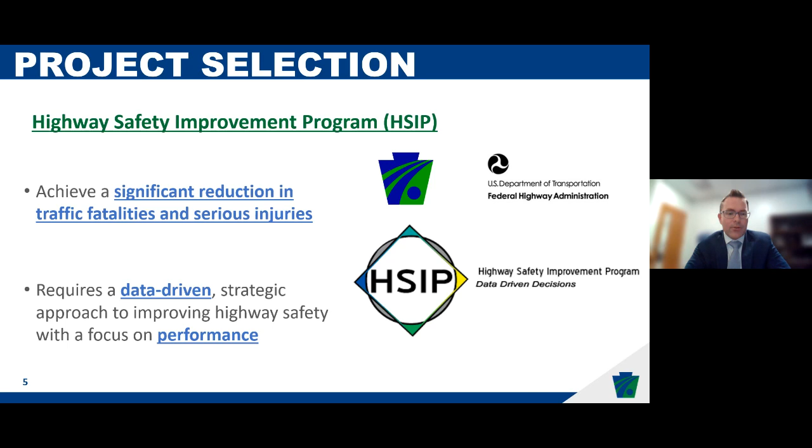Now I'll turn the presentation over to the design team and Andrew to run through the project and how crashes can be reduced along Washington Lane.

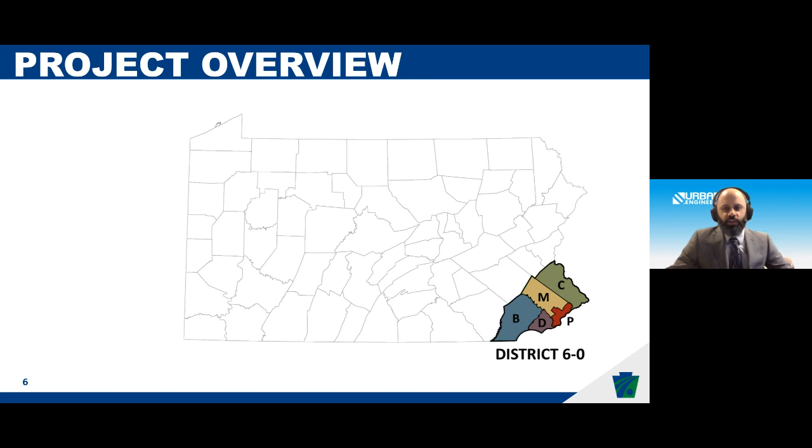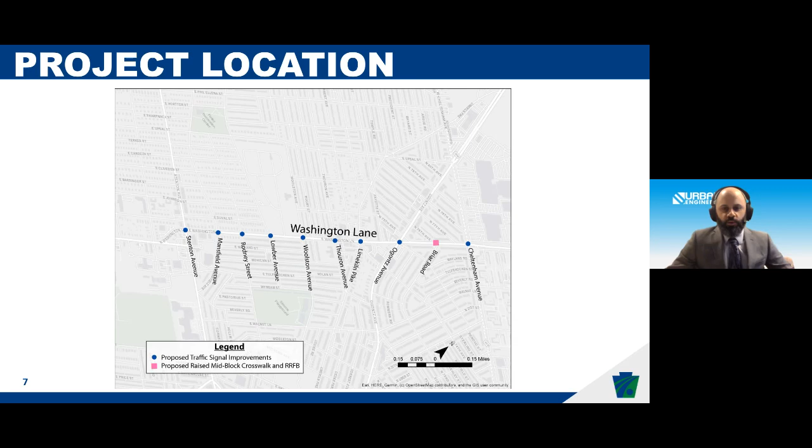Thanks, Nate. This safety project is located in Philadelphia County near the Montgomery County border. The project runs from Stenton Ave to Cheltenham Ave along the Washington Lane corridor. The project is localized at all of the signalized intersections shown here, with work included at Stenton, Mansfield, Rodney, Lowber, Woolston, Thouron, Limekiln, Ogontz, Briar, and Cheltenham Ave. Later in the presentation, Abby will highlight the proposed design at each intersection.

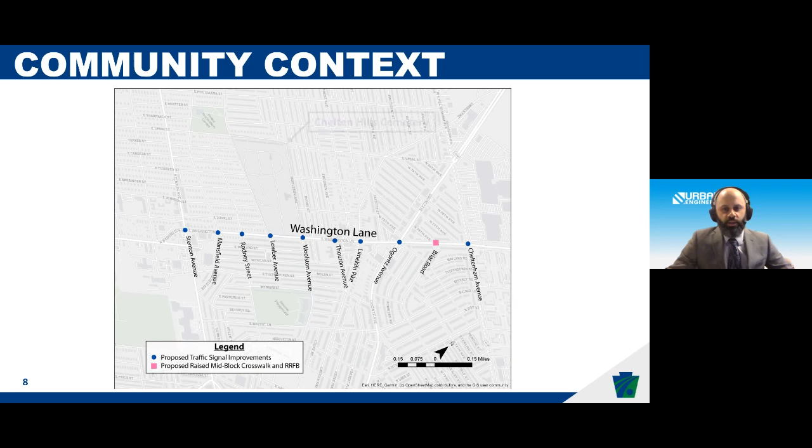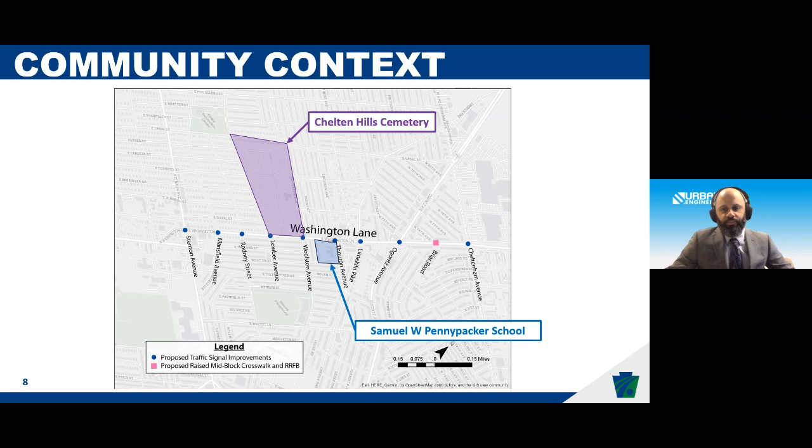Just to give everyone a little context of the corridor, there are three elements worth noting. In the area of Lowber and Woolston, there is the Chelten Hills Cemetery. Near Thouron Ave is the Samuel W. Pennypacker School. And at the northern limit of the corridor is the Washington Lane Historic District.

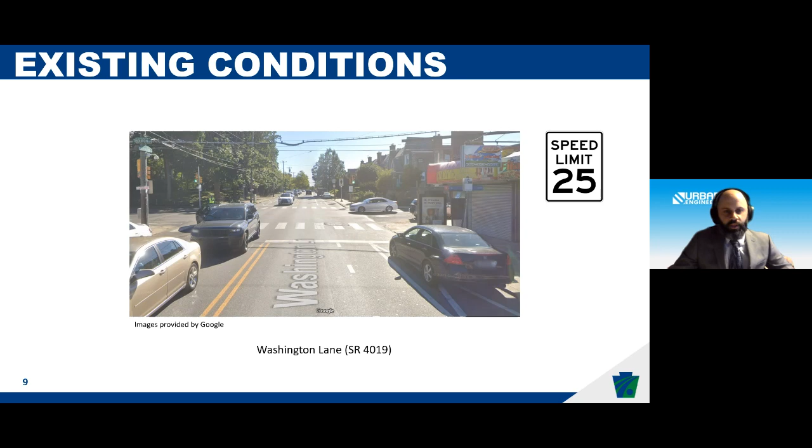Here's an existing photo to give context to the corridor. The project is about 9 blocks long along Washington Lane. The speed limit is posted at 25 miles an hour. We have one travel lane in each direction with parking on both sides and bike lanes on both sides. There are bus stops at all the signalized intersection corners, and it is a signalized intersection corridor.

So why we're here tonight describing this project to you, the purpose of the project is to reduce the number and severity of potential crashes along the corridor. Additionally, the project will improve safety for pedestrians and bicyclists at the signalized intersections. The project was selected and identified by PennDOT as a corridor with a high percentage of fatal, injury, and pedestrian crashes. The project's intersections have experienced 99 crashes over a 5-year period from 2018 to 2022.

Of the 99 crashes, roughly 15% of them were pedestrian crashes. Pedestrian crashes are very critical along this corridor, as pedestrians are vulnerable road users and do not have the protection of steel cages like vehicles. Crash numbers will be shown later in the presentation for each intersection.

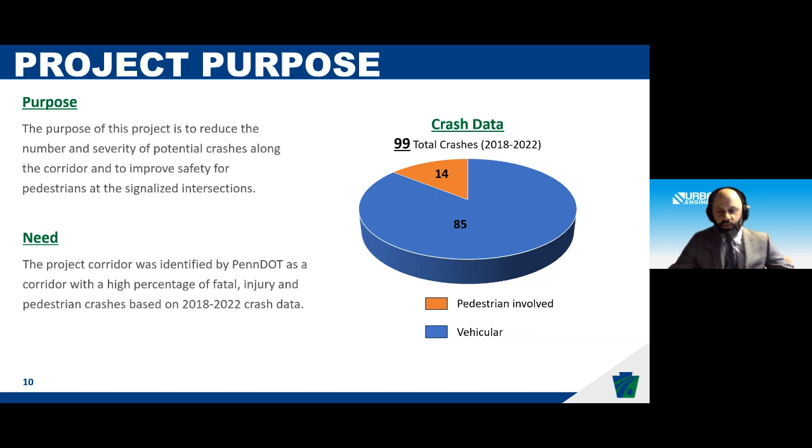To give a little project overview, we are located in Philadelphia, and PennDOT is aware of all the SEPTA routes present in the project area, both along the corridor and crossing it. We've also reviewed SEPTA's bus revolution recommendations, which show the Route 81 bus running along Washington Lane. As PennDOT enters final design for the project, we will coordinate with SEPTA on bus stop locations, and those may change through final design.

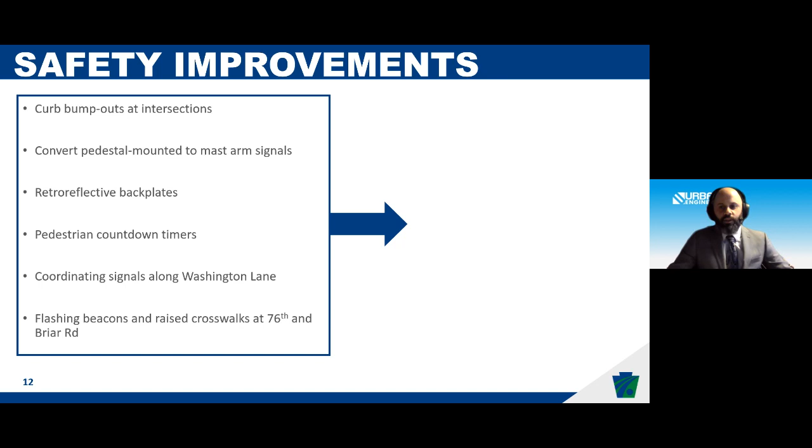This is a safety-driven project, so here's a list of the safety improvements that are proposed. Each safety measure was included in a highway safety manual analysis to determine the reduction in crashes. These improvements were evaluated at a corridor level, and the project is expecting to reduce overall crashes by 13% and reduce fatal and injury crashes by roughly 12%. The next few slides will explain what each safety improvement measure will look like.

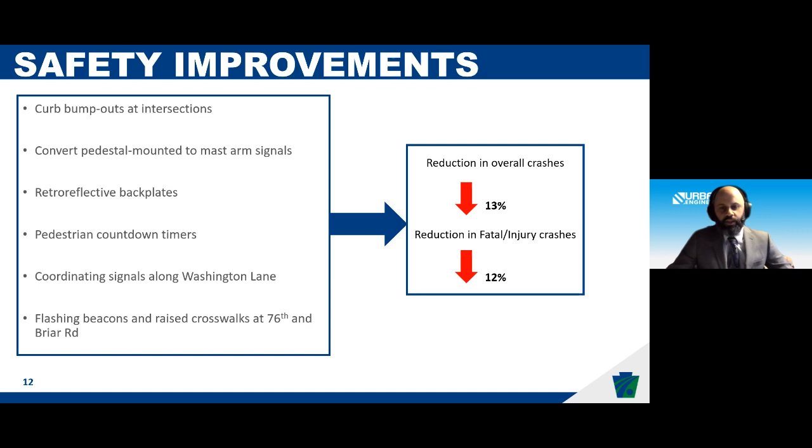Now we're going to get into the safety improvements included with the project: bump outs. All the intersections will have proposed bump outs where applicable. A curb bump out is when the sidewalk bulbs out into the intersection, taking up a parking lane or bike lane, or utilizing unnecessary pavement.

Bump outs keep pedestrians safer in three distinct ways. First, by making the crossing distance shorter for pedestrians, they decrease the time a pedestrian is in the street and vulnerable to being hit by a car. This also allows the pedestrian to complete the crossing more quickly, thus allowing traffic to flow better.

Second, bump outs also serve to make the neck of the street narrower at the intersection. This restricts cars from making lefts and rights too quickly, slowing them down. Lower speeds increase the time for a driver to see a pedestrian and decrease the likelihood of severe injuries if a pedestrian gets hit by a car.

Third, bump out installations essentially prevent vehicles from illegally parking near the corner. Vehicles at corners obstruct vision for drivers making turns, as well as for pedestrians seeking to cross.

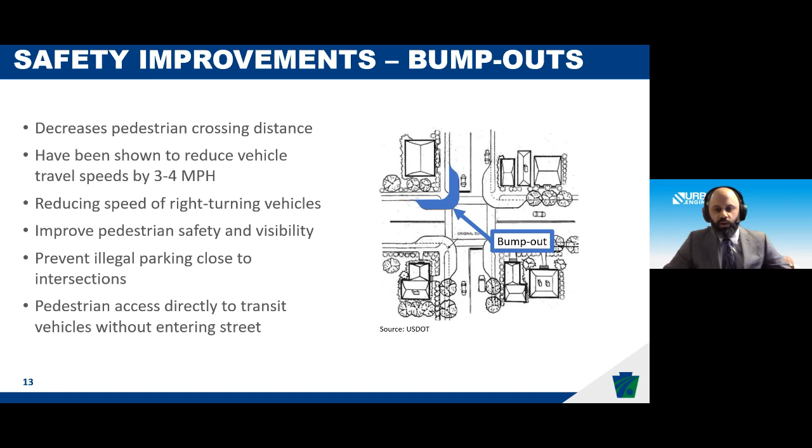One feature of these bump outs, to better improve bicycle presence at the intersection, is to bring bikes up to sidewalk level at the intersections. This allows buses to load in lane and removes the conflict of a bus boarding and unboarding while blocking a bike lane.

Here's an image provided by a City of Philadelphia employee, showing an example of a surface bike lane in Seattle, Washington. You can see the bike lane striped out here in green, and off to the left is the bus shelter for loading, so pedestrians will have to cross the surface sidewalk-level bike lane.

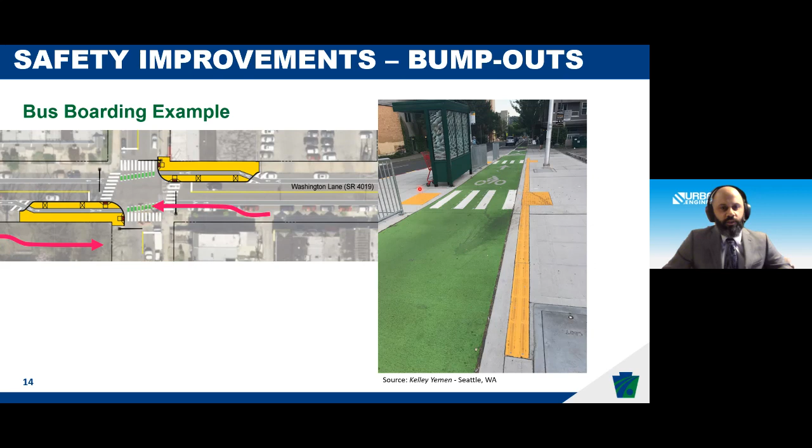Here's another photo of a bus boarding segregated from a bike lane. This eliminates the immediate conflict of a bus unloading passengers onto a bike lane or blocking it.

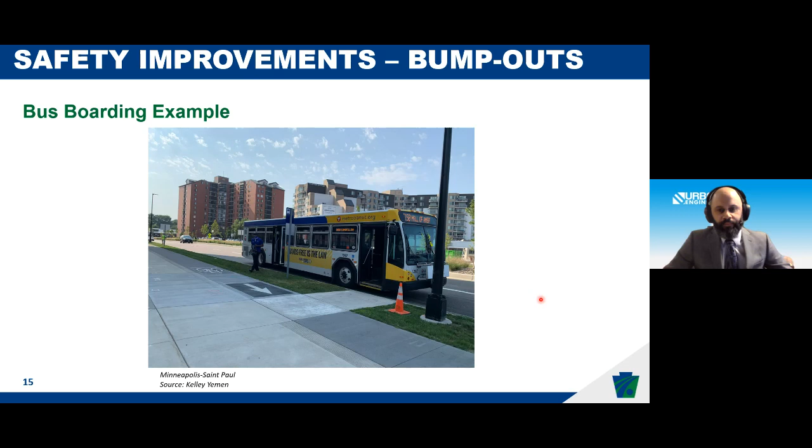Here's an example of a bump out. You can see the curb line curves toward the roadway by eliminating the shoulder.

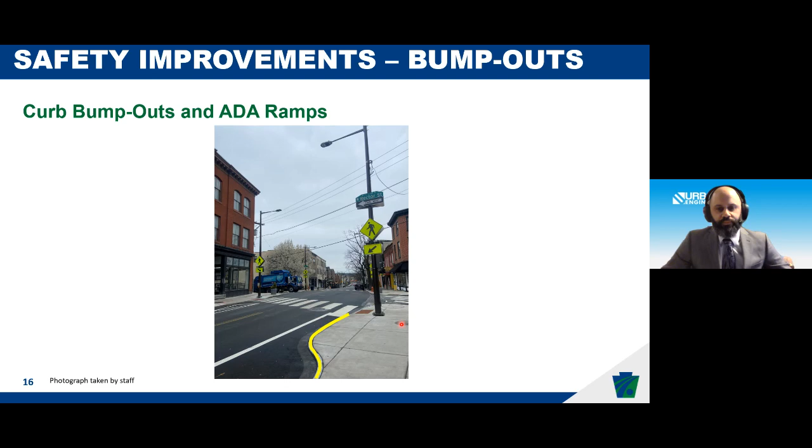The project will be converting old pedestal mounted signals, shown on the left, which are typically off the roadway, to mast arm signals, shown on the right. Mast arm signals place the signal overhead the lanes to provide better visibility for oncoming vehicles.

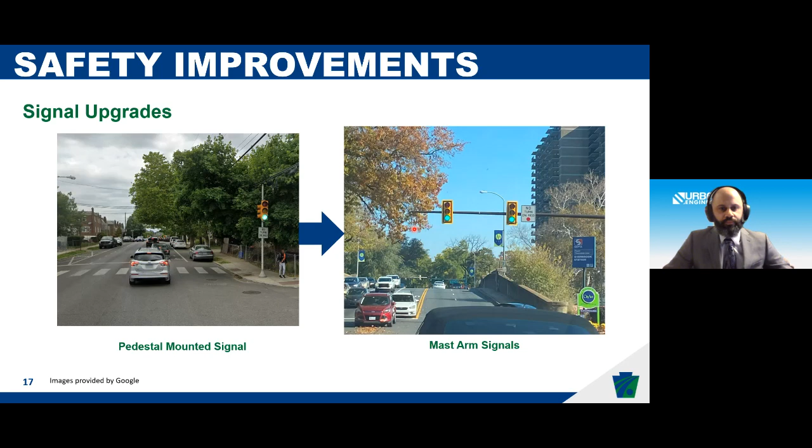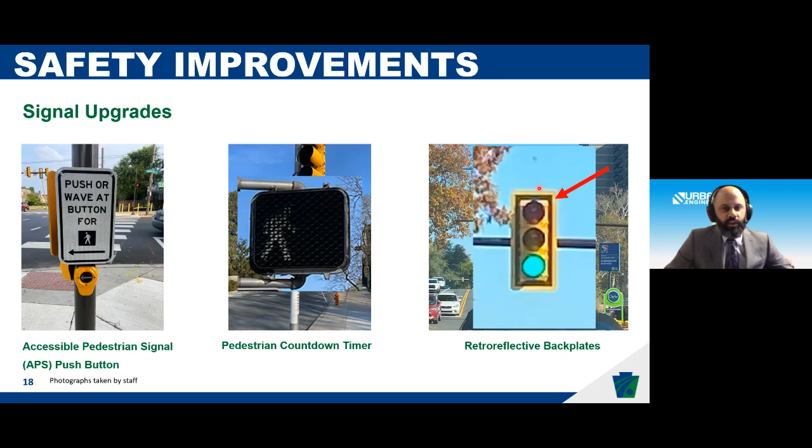The project will also install accessible pedestrian signals, or APS push buttons, shown here on the left—you simply push it or wave at it to actuate the signal. We'll also be installing pedestrian countdown timers and retroreflective backplates with a yellow border around the signal to improve visibility.

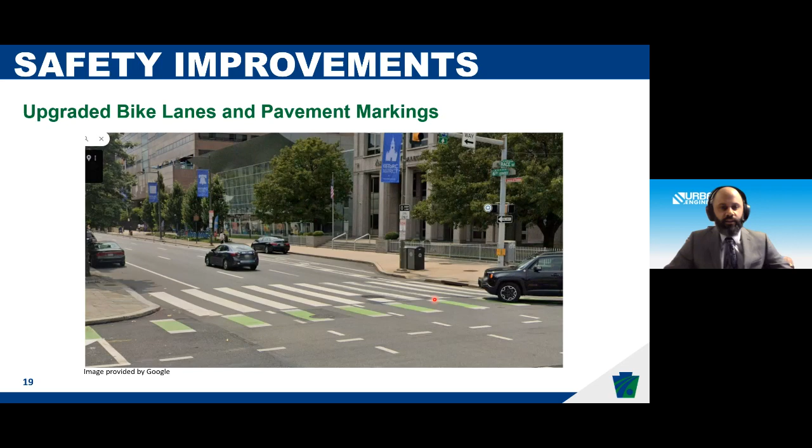Pavement markings will be refreshed throughout the corridor and include bike lane conflict markings to better delineate traffic, both vehicular and bicycle, through the intersections. This will improve visibility of bikes along the corridor, specifically at intersections where there are conflicts.

The project will also install a rectangular rapid flashing beacon, or RRFB. These are a proven safety measure to improve yielding compliance at mid-block crossings. To actuate the signal, each pedestrian must push the button or wave at it while standing on the ramp. RRFBs are a proven safety measure from Federal Highways and can increase compliance by upwards of 98%.

Also, the Briar Road mid-block crossing that's being proposed, which you'll see concepts of from Abby later, will be a raised crosswalk, where the roadway profile is raised to match the level of the sidewalk. This slows cars down and makes the sidewalk-to-crosswalk transition easier from a pedestrian perspective.

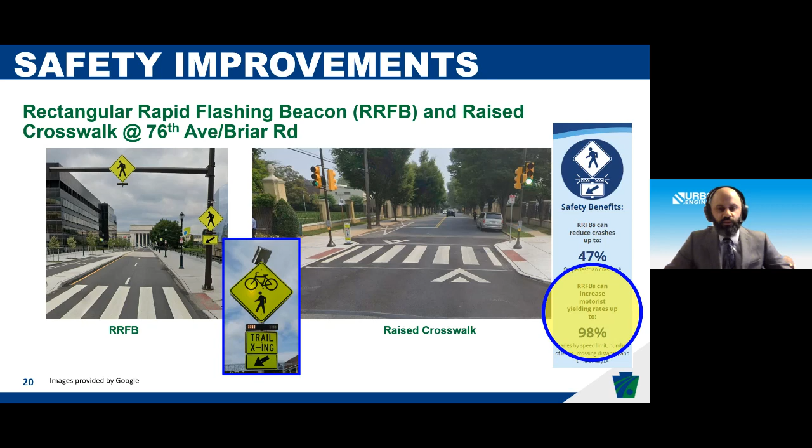Now I'm going to pass it off to Abby, and she's going to get into some of the design elements for the corridor. Thanks, Andrew.

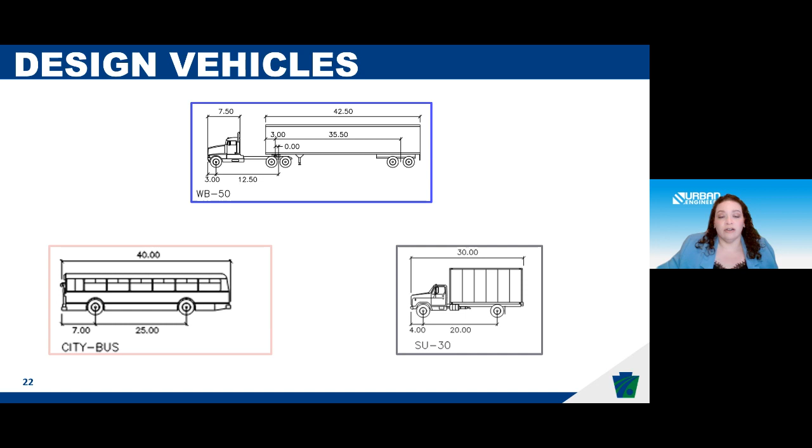So we heard about a lot of benefits of bump outs, like slowing down turning vehicles, but one of the elements we have to balance with that is the need for larger vehicles to be able to make the turns around these new curbs that extend into the former road. Depending on the type of road, we look at the main road and the cross street and determine, based on city standards, what type of vehicle needs to be accommodated. The vehicles you see here are three of the vehicles we're designing for, and they vary throughout the corridor. On each slide for each location, we'll see the vehicle that needed to be accommodated by those turns, and in some cases that informed where we could and could not design bump outs.

We are going to now walk through each location of the design. Along Washington Lane, we are planning improvements at the following intersections: Stenton, Mansfield, Rodney, Lowber, Woolston, Thouron, Limekiln, Ogontz, Briar, and Cheltenham.

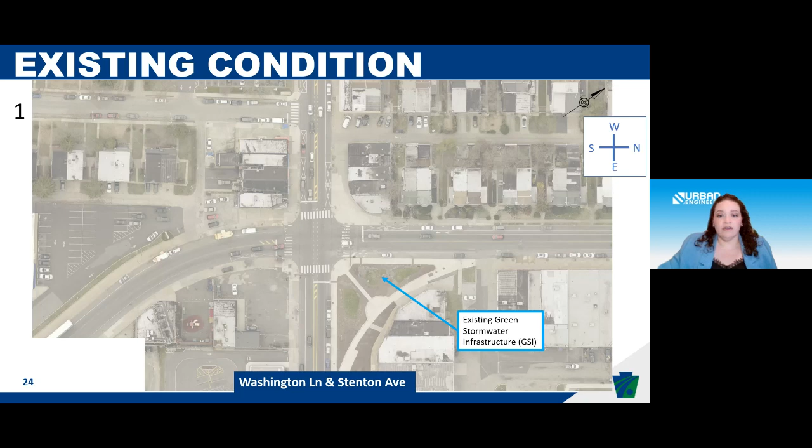This is the first location along the corridor. This is one of the limits of our work, at Washington Lane and Stenton Avenue. We can advance here to the proposed design.

There are a few things before we talk about the design itself that we want to point out on each slide, so as we go through, you'll be able to take notice of these different pieces of information. In the upper left-hand corner, there's a box showing the number of parking spaces that will be reduced by implementing this design, and also the total crashes at the intersection within our study period. There's also a legend in the bottom left corner, and particularly in the legend, we want to call your attention to the blue, meaning proposed traffic signals, and the purple color, which are existing traffic signals that are receiving upgrades on the poles that are already there.

Finally, to call your attention to the compass in the upper right-hand corner: because the direction of Washington Lane is a little bit off true north, we wanted to call this out so when we refer to directions while talking about the design, it'll be clear what we mean. In this case, we're considering Washington Lane to run north to south, so north is to the right of each slide, south is on the left, and our cross streets run east-west. Hopefully, as we refer to different corners, we can use that directional system to be clear.

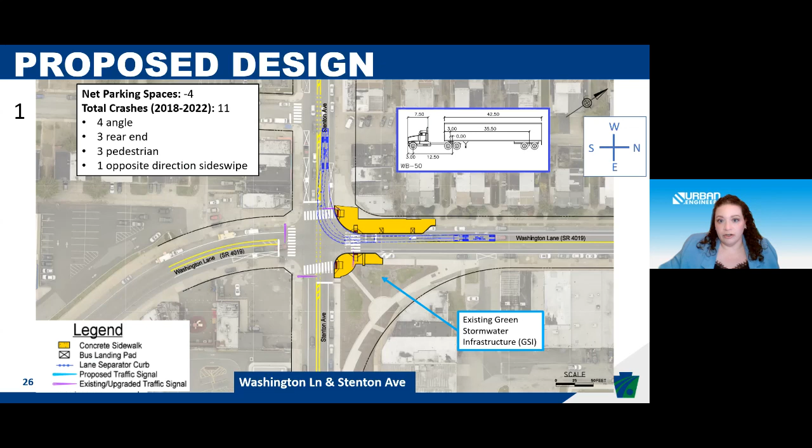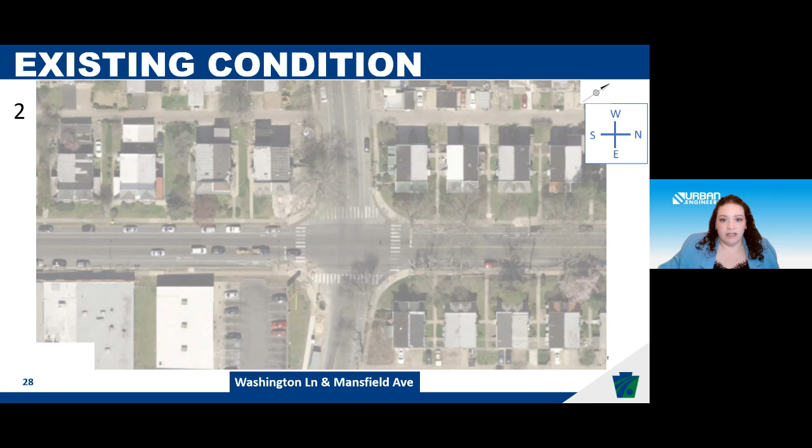Next, we're moving on to Washington Lane and Mansfield. This is a very standard looking intersection, nothing particularly unusual about it. At this intersection, we were able to accommodate bump outs at all four corners.

The vehicle we had to accommodate, because of the type of roads meeting here, was on the smaller side—that's the one you see in the upper right corner. Andrew talked a bit about the sidewalk level bike lanes and how they interact with bus boarding. The two longer bump outs you see across from each other are that combination bus boarding and sidewalk level bike lane design. The other two are still providing, even though they're short, the surface level bike lane and the benefit of visibility for pedestrians and shortening the crossing distance. This intersection will also receive new traffic signals.

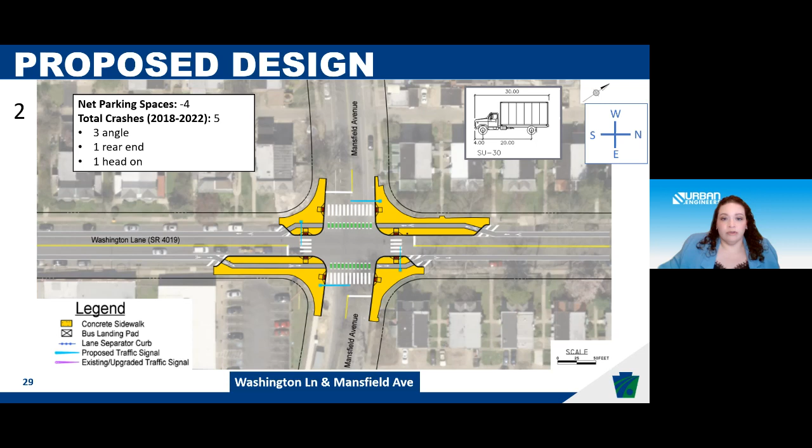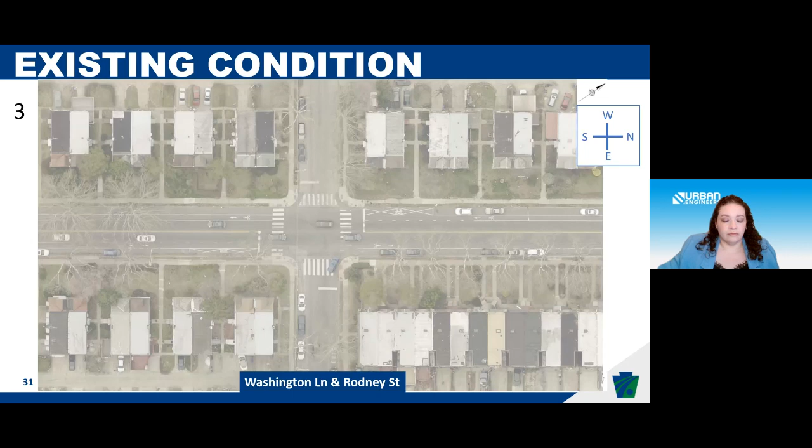Next, we're moving on to Washington Lane and Rodney. Again, nothing particularly of note here on the existing condition, but this is a bit of a smaller cross street. Again, we're accommodating one of the smaller vehicles, so we were able to fit bump outs at all four corners, very similar to the previous design. We're also improving, upgrading all the traffic signals here with new signal equipment.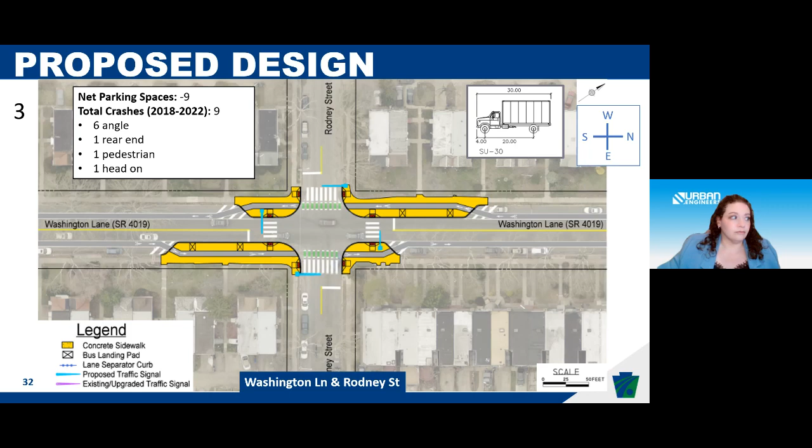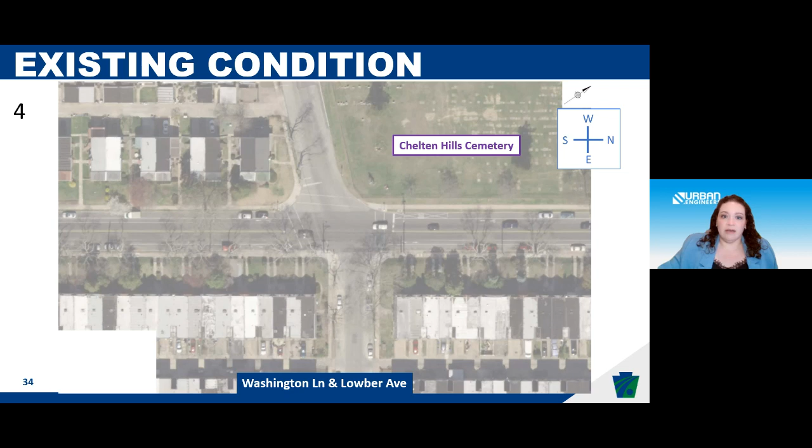The next location we'll look at is Washington Lane and Lowber Avenue. Something to note here, we are bordering the Chelten Hills Cemetery, and there is a bit of a skew to Lowber from one side of the intersection to the next. So what that meant for our design was that we were able to accommodate the 2 longer bus boarding bump outs. We did not include one at the northeast corner because it worsened the condition that already existed of the intersection being skewed, and made turning difficult.

At the southwest corner, we are not proposing a bump out, but we are redoing the sidewalk on the corner so that the curve of the turn is a little smaller. That can have the effect of slowing down vehicles as well, and it also allows us the opportunity to design ADA ramps that are compliant to current standards. This intersection also receives new traffic signals.

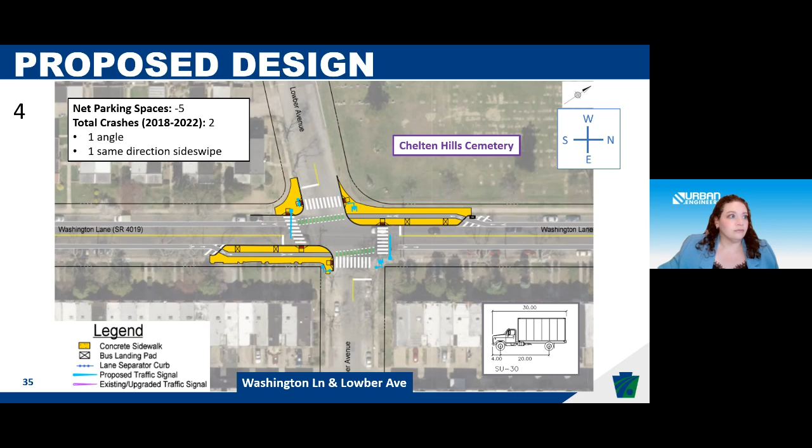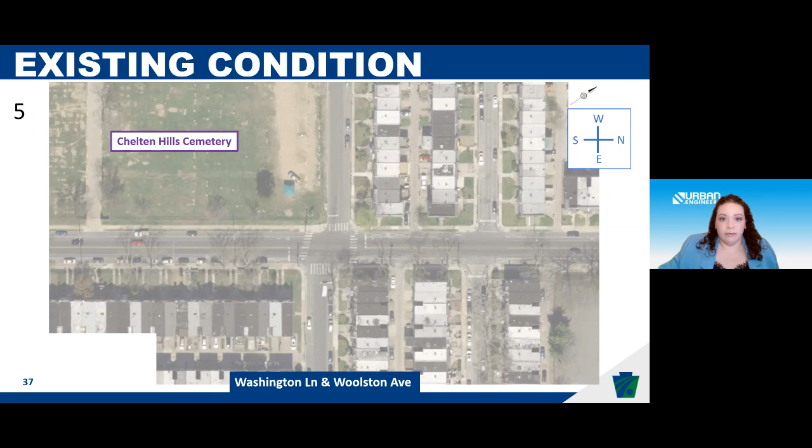Now we'll move on to Washington Lane and Woolston Avenue. The cemetery stretches the entire block, so here we are at the other end of the cemetery, and we have that same sort of skew condition of the cross street from one side of the intersection to the other. Here we were able to accommodate the 2 longer bus boarding bump outs, but not bump outs on the other 2 corners, again, which worsen the alignment of the cross street and also made the turning movements difficult for the design vehicle. This intersection will get new traffic signals as well.

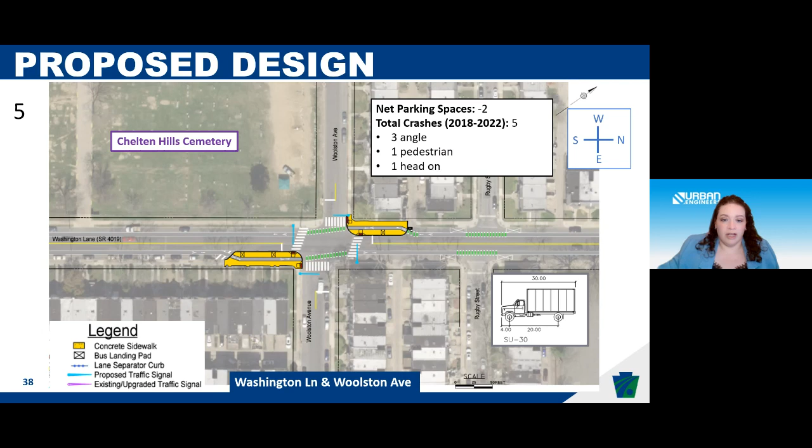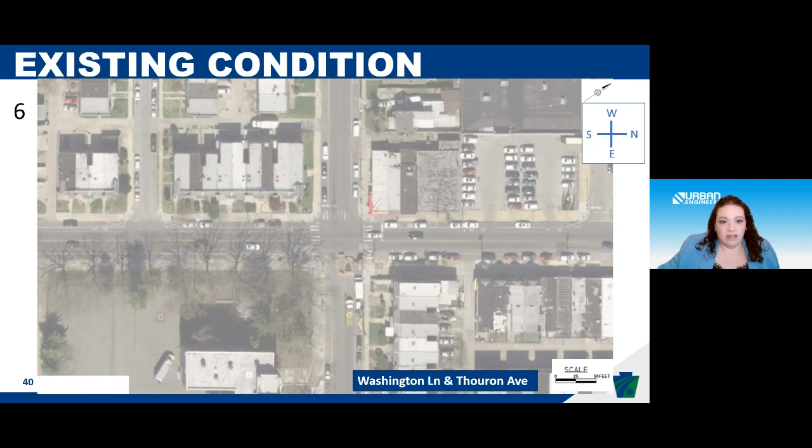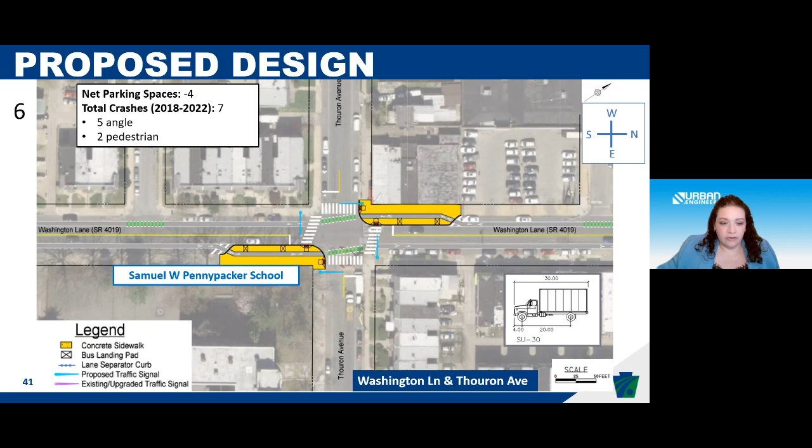Now we'll take a look at Washington Lane and Thouron Avenue. This, again, was a pretty standard aligned intersection, and you can see we're bordering Pennypacker School there. This intersection was able to accommodate a design of 2 longer bus boarding bump outs. The other 2 corners, we were not able to fit them in due to needing to allow space for the vehicle to turn.

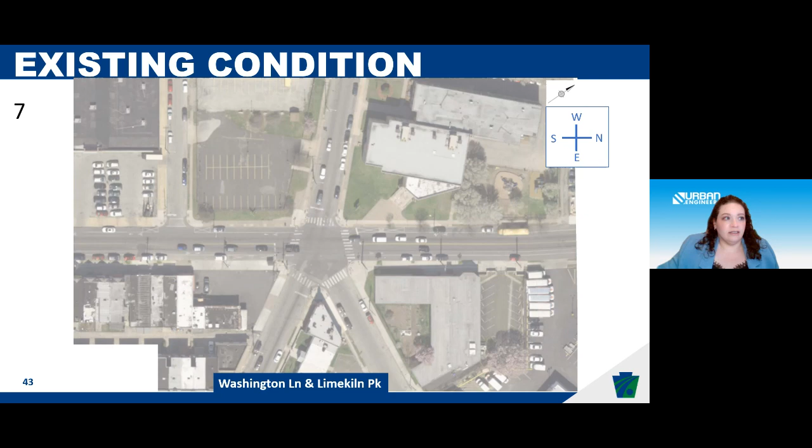Now we're moving along to Washington Lane and Limekiln Pike, and this is a 5-way intersection, which makes it a little unique, but when we look at the design, we are actually still able to accommodate bump outs at 4 of the corners. This intersection is also getting new traffic signals.

There we can see that 74th Avenue is one way away from the intersection, and we can still fit the bus boarding bump outs, and then the other two corners as well receive them.

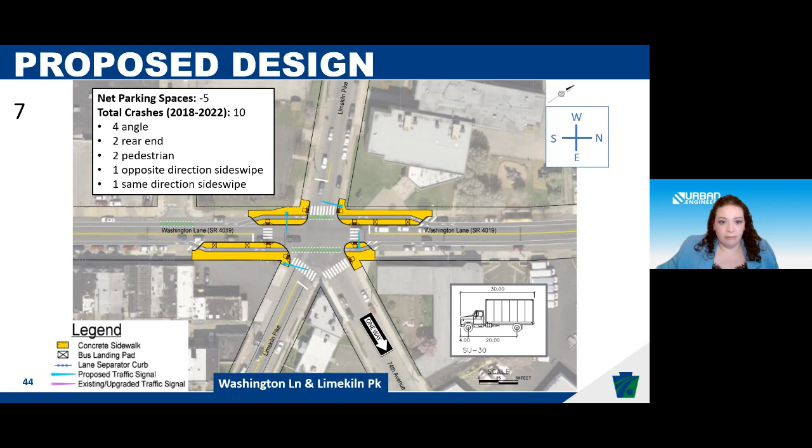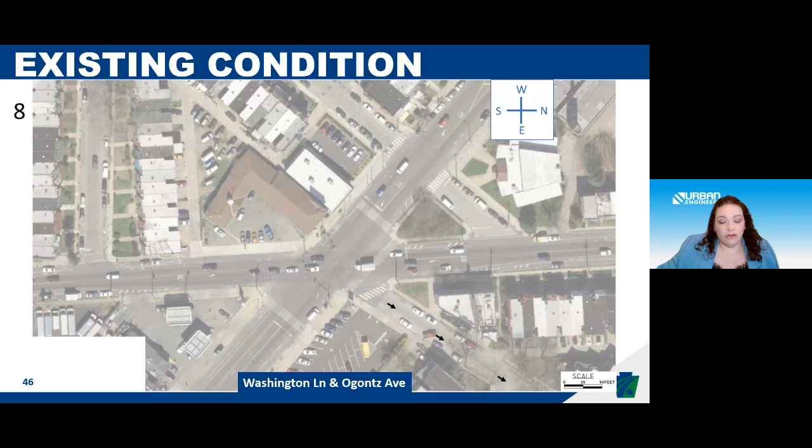Now we're going to move on to Washington Lane and Ogontz Avenue, which is also a 5-way intersection. This intersection is a bit different from the others because in most cases when we design a bump out, we are utilizing space from the parking lane to be able to move the curb out further into the street. In this intersection, turning lanes are introduced close to the intersection on Ogontz and Washington Lane, and to accommodate the space that the turning lanes take up, the parking lanes drop off. So we don't have that space available like we do at the other intersections to utilize for bump outs.

So looking at what safety improvements we could provide here, the yellow area was an area where we were able to introduce a bump out, and it will be a bus boarding bump out. We are also making an improvement at the northeastern corner where we're upgrading an ADA ramp that is not compliant to standards.

Close to the intersection, we can see in the upper left-hand corner an example, and the blue dotted line in the plan view relates to the picture in the upper left-hand corner. This will be a lane separator curb. What this does is when traffic is light at slower times, turning vehicles can cut across lanes, and this vertical element prevents cars from cutting across in that way.

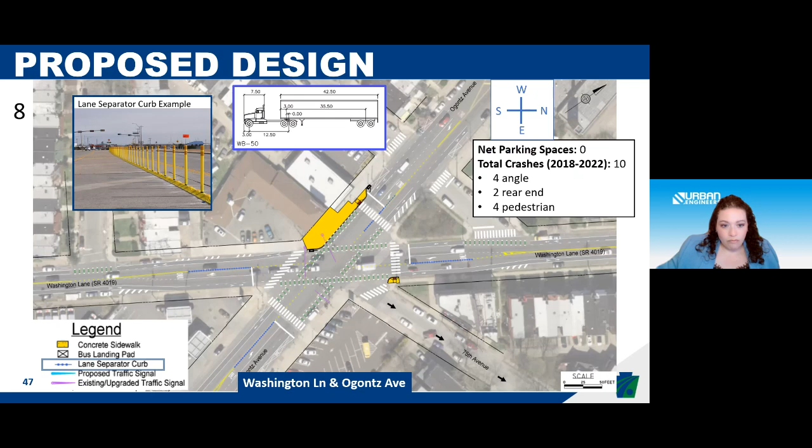Now we'll move on to Briar Road. This is not a signalized intersection. It is an intersection with 76th Avenue and Briar Road where there's no traffic signal today. The reason we are planning improvements here is because there is a larger distance between the nearest two signalized intersections that offer a crosswalk. So for someone who does want to cross here, it is unlikely for them to walk to the nearest signalized intersection to be able to do that more safely.

In cases like that, it can be a safety improvement to provide a mid-block crossing. Andrew showed us some examples of what those can look like, but there is a flashing light with signs when a person arrives to cross here that is actuated, and there are markings in the road that indicate that the car needs to stop and give pedestrians the right of way to cross here. This is accompanied with bump outs that also make that crossing distance a little bit shorter.

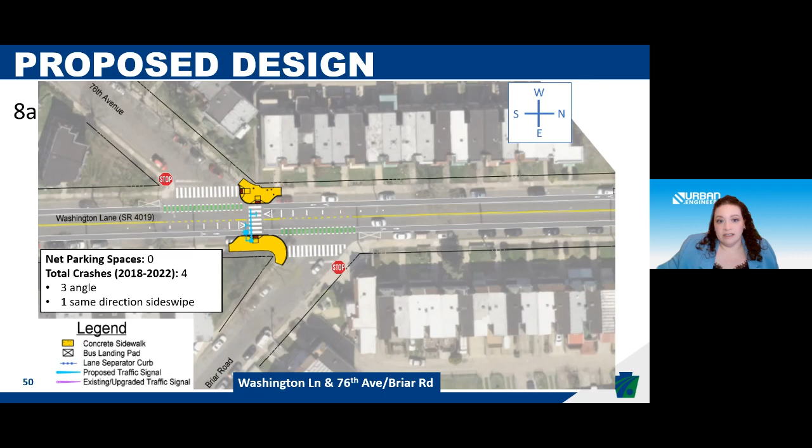Here's an example of what this would look like in 3D. The crosswalk itself is actually raised to meet the level of the curb, so there's no ramp up and down.

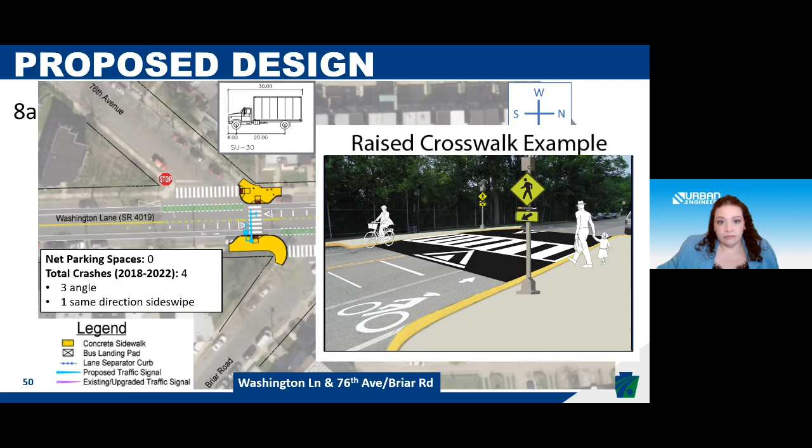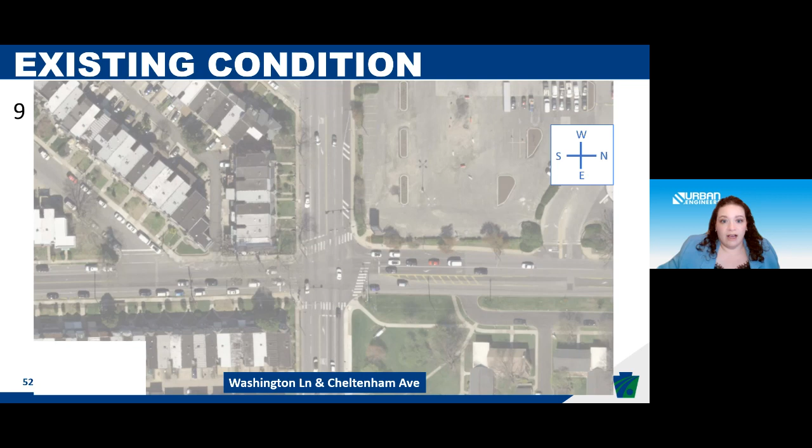Moving on to our last location, Cheltenham Avenue, which is the limit of the city and county of Philadelphia and the limit of our project. We looked at designing bump outs here, but there were alignment issues from one side of the intersection to the other. So the safety improvement we opted to provide doesn't include bump outs. Instead, it's improvements to the intersection striping to better align the lanes from one side to the other. The signals on the Montgomery County side were recently upgraded as part of another project, so we are not proposing signal upgrades here.

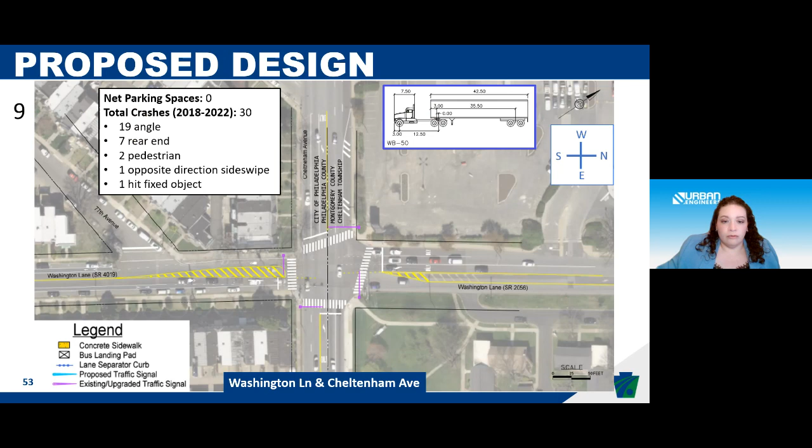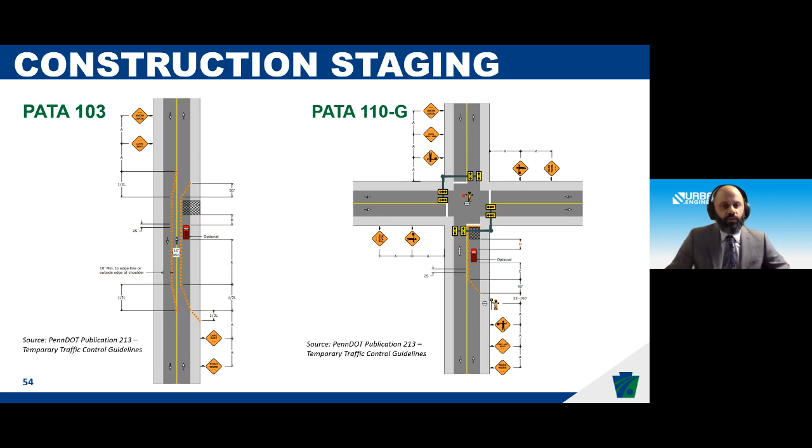An additional consideration is how pedestrians will cross these intersections during construction. There will be short-term closures and pedestrian diversions around the work zones. This is a very common situation in Philadelphia during construction, and the city has prepared standards referred to as the Temporary Pedestrian Access Route, or TPAR. Pedestrians will be diverted around with temporary mid-block crossings, or diverted from a nearby block or intersection as each corner is being completed. This happens when they're doing the ADA ramps, because they have to form the concrete, pour it, and let it cure. It's not something that can be done all in a 24-hour window.

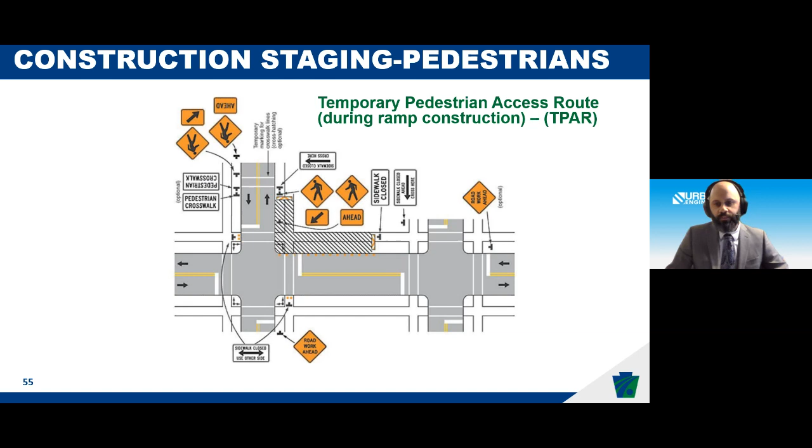Next, we'll get into the project schedule and what's next. As we finish this public meeting and our public outreach, this will allow us to close out the last piece of our environmental clearance, and then we'll move into final design. The next step is coordinating with utility companies for relocations. If we're moving curb lines, we're potentially impacting drainage inlets, so we'll have to reconstruct them, which opens up potential utility conflicts. There's no right-of-way needed on this project, so we won't have to take any property from anyone. It will all stay within the footprint of PennDOT's owned legal right-of-way.